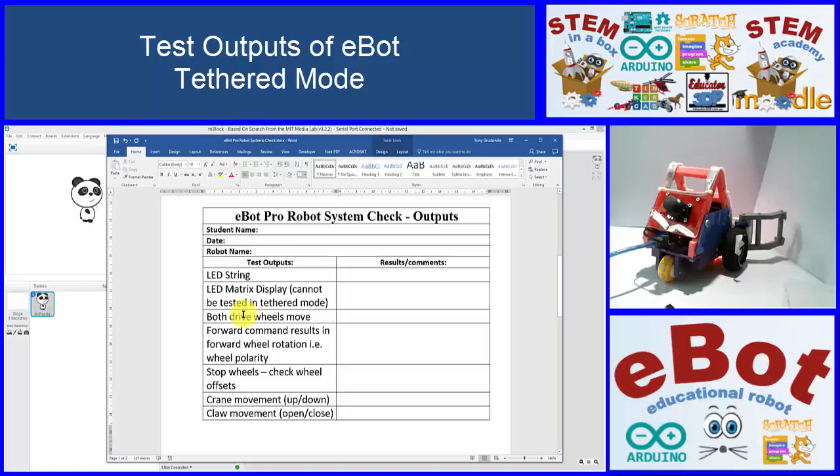Okay, now let's start with the LEDs. We're just going to do one by one, and then we can aggregate them. So let's turn them all on to green. Great, and they've all gone to green.

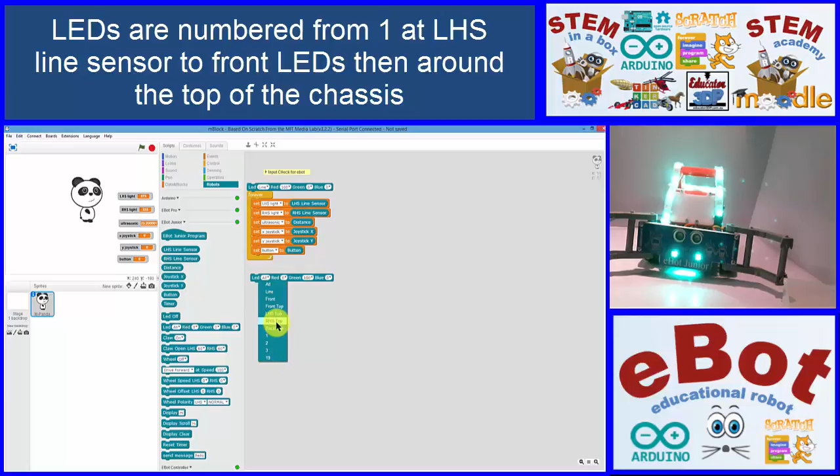Okay, now they're all individually addressable, and you can actually use these - well, these ones here won't work for the Junior, they're for the Pro - but you can just type in a number.

So if you want the line ones only, first you see what we're going to have to do is turn the LEDs off, turn them off, and then turn on what you want. So if you only want your line ones green, now you can see your line ones are green. So anyway, they're perfectly working, there's nothing wrong with that.

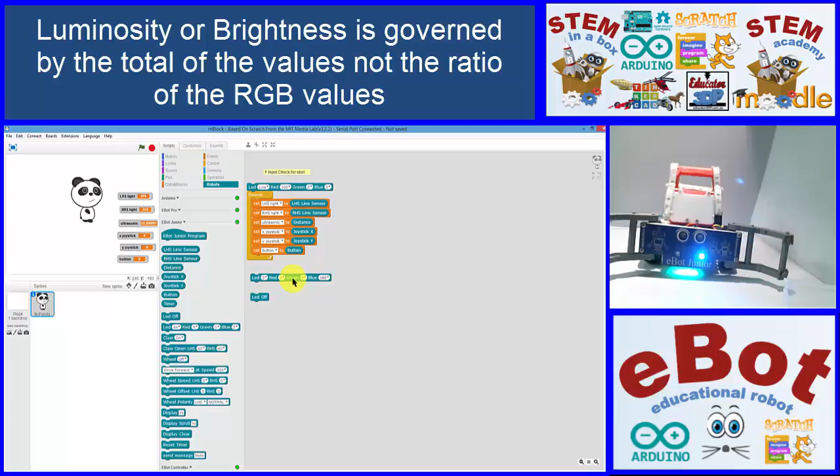You could also type in - one starts at the left-hand line sensor - so if you just wanted the front ones to go a different colour, that would be number 3, and you wanted that to go, say, blue. So number 3 comes on blue, etc. So I think you get the idea there.

Okay, so the LEDs are a check. The LED matrix we can't check in tethered mode. We have to write some code, we have to download some code.

So let's do the wheels. Before we do the wheels, let's pop it on a little test rig so that it doesn't take off. So what we're going to do is we need to do a couple of things.

The first thing we need to do is check that both of the wheels are connected, and we need to check that left is left and right is right. So let's drag the wheel off command there, and let's drag the wheel speed, and let's drag the wheel offset - I'll show you what the offset is going to do in a minute - and we're going to need the polarity.

Now the explanation for those is that when you flip the servo across to the other side, counterclockwise becomes clockwise. So we need a method so that you can issue forward, and forward would really be backwards for the one that you flipped. It's like your left is my right. So that's why we can do that in the software - it's just easier. Okay, so what we're going to do is just check that first.

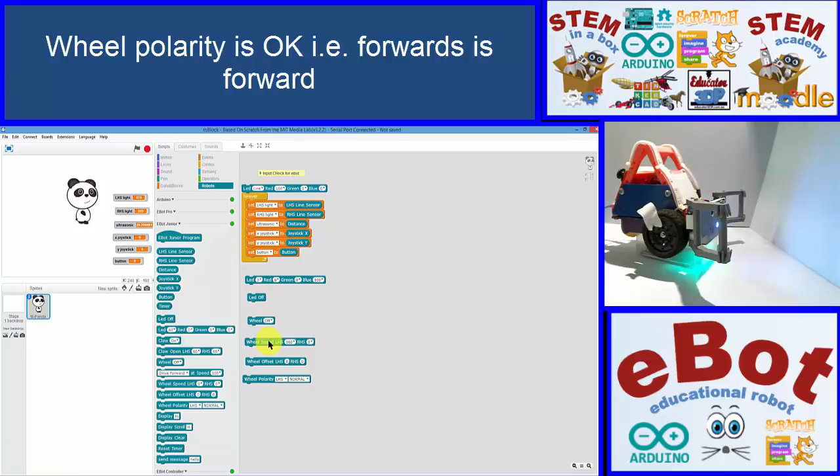So what we're going to do is we're going to get both motors to go. Well, we're going to get the left-hand motor to go forward. So let's just click that, and you can see there - I've just put some tape so that you can see it. So the left-hand motor is indeed going forward, so that's not a problem. We don't need to adjust the polarity for that - it must be what's called normal.

So now what we're going to do is turn on the right-hand side motor, and that's going forward too. Now,

if one of them was not going forward, I'll give you an example - what I'll do is I'll make the left-hand side reverse, and send that down, left-hand side reverse. Now let's turn the wheels off, and now let's turn the wheels back on. What you'll see now is that the left-hand side is going backwards, and that's because I've swapped the polarity here.

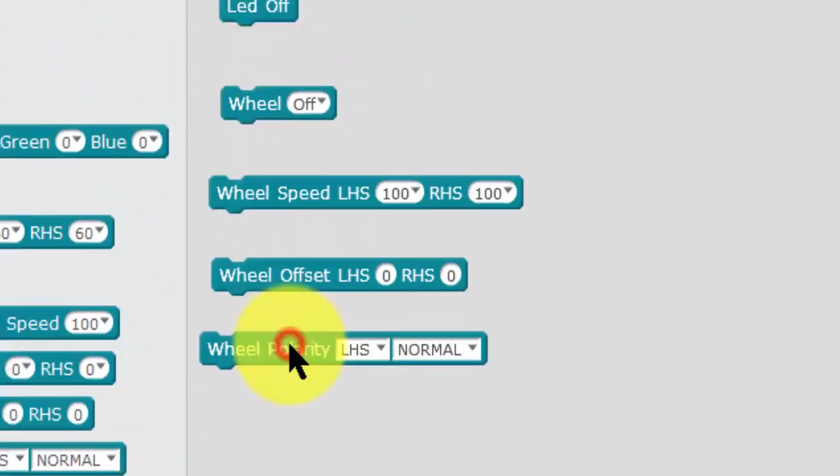So if when you do this first test, you get one of them going backwards - when you tell it to go forward, 100 is forwards obviously, negative numbers are backwards - then what you would need to do is reverse whatever you've got here. So I'm going to reverse that, swap it to the other way. First I'll turn it off, and then I'll make the left-hand side normal. So you'll need two of those really - one for the right-hand side.

Okay, so I'm going to make both of them normal, and then we'll see what we get. That's better, so left hand is actually normal, that's correct. Now the right hand one is going backwards. You should get one being opposite to the other, so the right hand side is now going to be reversed. I should have done that first, sorry. So I've just got my left hand normal and my right hand reversed because it was going backwards, and now they're both fine, okay?

One of them should have a reverse polarity because it's flipped. It's not necessarily because sometimes from the factory we get servos that are backwards to the others, occasionally. So that's the wheel polarity or the wheel direction. Forward is forward, backwards is backwards.

Great, we've done that now. So what we're going to do now is we're going to check is the left hooked up to the left and is the right hooked up to the right. So we're just going to stop the right hand side motor and issue that command. And the right hand side motor has stopped. So now we know that when this was built, or someone hasn't swapped it around, we know the left-hand motor is connected to the left-hand motor pin, and the right-hand motor is correctly connected with the right-hand motor pin.

Great, so what we need to do now is we need to check the all-stop drift, which is called the offset. So let's issue an all-stop command, and let's start with the right-hand side motor. What you will see is the right hand side motor is drifting slightly backwards. So we need to make it go slightly more forward, and forward is positive. So if we go to the offset, let's make it right hand side.

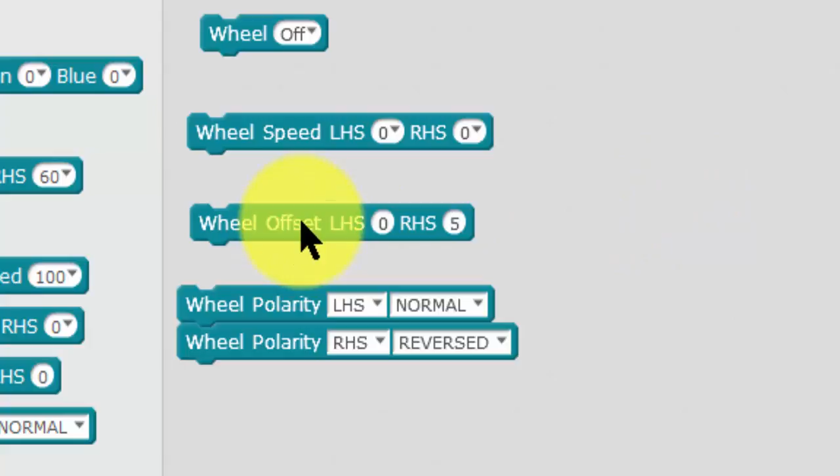So let's make it 3, and we're going to issue that. Okay, hasn't made any difference, so let's make that 5. Alright, let's try turning the wheel off and issuing the wheel offset and doing it again. Okay, a little bit more. Let's make it 10. So now I made it 10 and it's going slightly forward, so 10 is obviously too much.

So what we're going to do is make that 7. I'll just turn them off in between. So let's make it 7. Now that looks like it's about perfect. So 7 is my right hand side offset.

Now I need to do my left hand motor. So it's going forward, so it's going to need a negative offset. I'm just going to turn it off. So it's going to need something like, let's say -5, and I'm just clicking that to send the code, and then, I'm doing speed, sorry, I need the offset. So make that -5, send the code, and then get them going. And looks like I guessed it correctly, so it's not moving at all now with a 0 command.

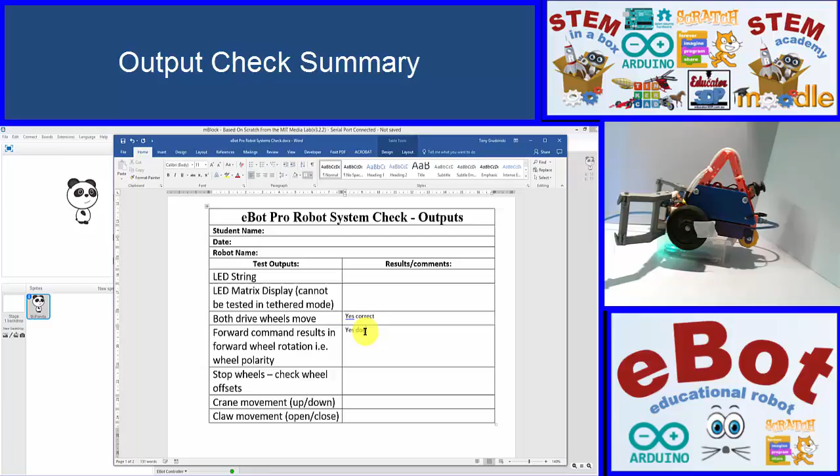Okay, great, so now what have we verified? Let's go back here. What we've verified is that both the wheels move, yes. The forward is forward, yes, so we've done the polarity. We've done the offsets, correct, yes. So we've done all of those, that's yes, correct, so the polarity. Yes, that's done, so we could record what it was. It's recorded there, so that's fine.

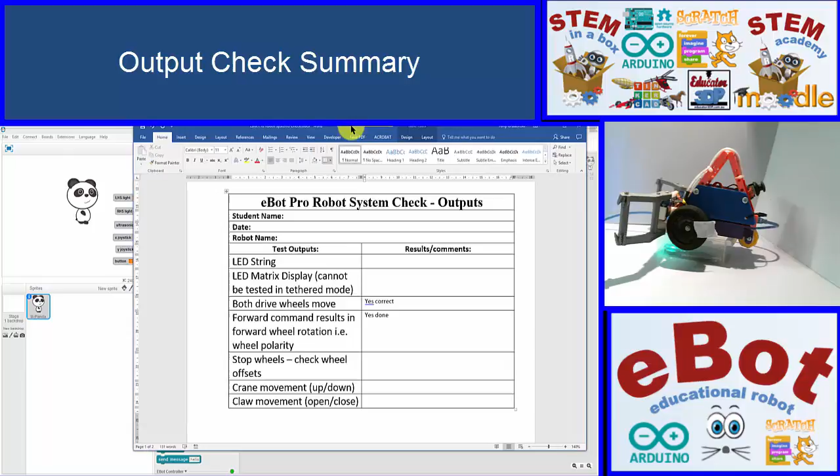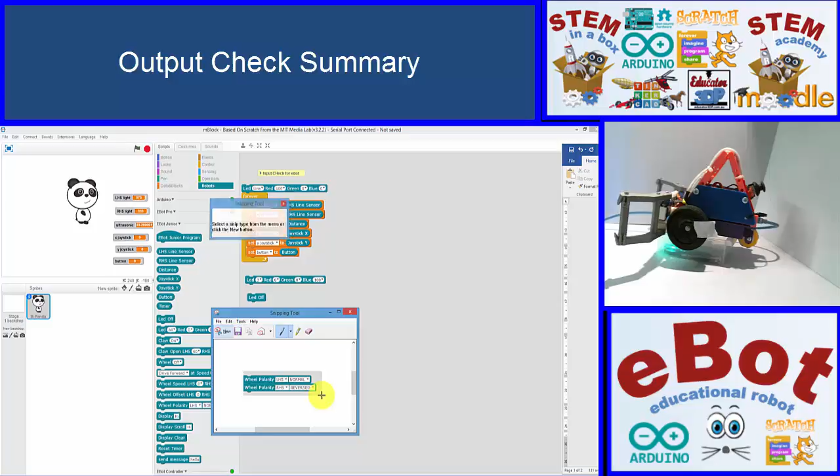And the offsets, so the offsets were, you know, if you wanted to, you could get them to record that they've actually done it. So we could go to the wheel offsets there. I'm going to copy that and put it in there, and let's say the wheel polarity, I'm going to copy that and put the wheel polarity in there, just so there's a record. Both drive, yes, yes.

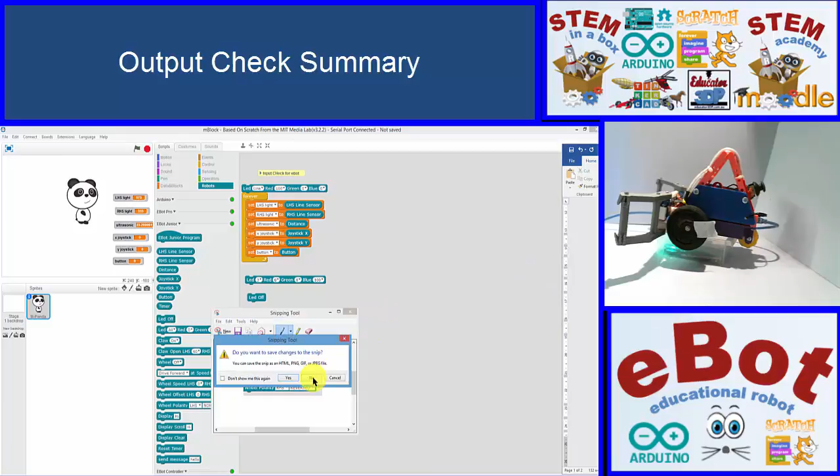So what I've been doing there is copying and pasting those screen snippets. This is my evidence, and it's also a record of what the polarity is for the robot name, or whatever it is, for this student's name.

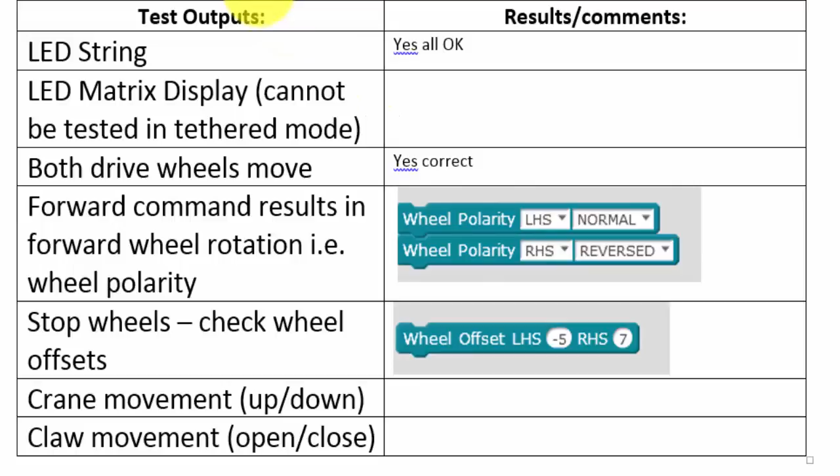So now we just need to go and do the crane. I'll put that back down there. Oh, the claws - the eBot Pro has claws and crane, the Junior only has claws. Alright, so let's grab some space.

I'll leave that there, don't jump to that, and we'll put all the wheel stuff here, like that. Put that there. Okay, now left and right claw. So what we're going to do is grab the claw on and off, and we're going to grab the claw open and shut.

When you first get the robot, what you need to do is close them both like this - we would have assembled it anyway, but if you got a kit or something. So that's open, 0 is obviously closed. You don't want them to close too much, because it depends what you're doing. If you want them to close all the way on 0, that's fine. It's just up to you.

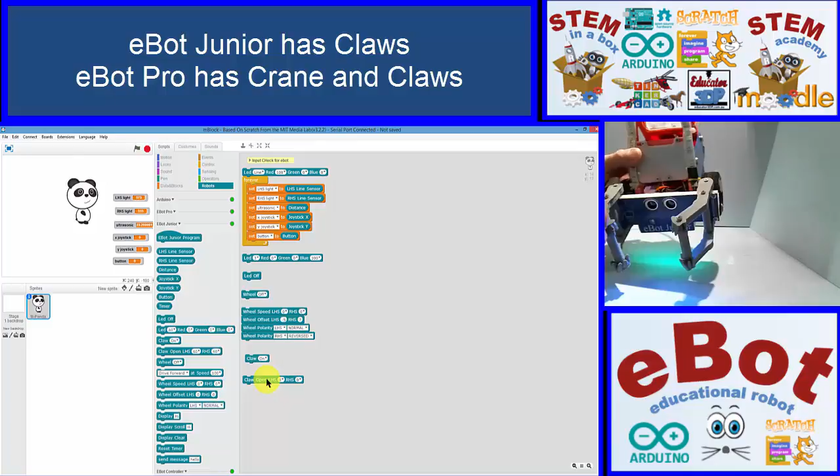If I wanted them to go further, I would just need to unscrew a couple of millimeters of the tensioning bolts here, and then unscrew the servo spline bolt here, lift it up gently, move the claw in 15 or 20 degrees, and pop it back down on the spline. Then when I go 0, they'll be where I want them. I've deliberately set the claws at that position because usually you're picking up big things, and you don't want the claws grinding on themselves too much. So that's at your discretion.

Now I'm happy with that, and I know that's the position I want. So now I'm going to issue the all 100% open command. Now you just need to check it's not smashing on anything, which it is - it's just hitting the rubber tyre, because these are really big tyres. So that means there's no hardware way out of that, because the servo rotation is set. We can't change that.

So what you need to do is maybe go 80 and 80, so they come in a bit, and now they're off the wheels. So what I would do then is I would want to record this, and go fully open - so I wouldn't actually use 100 and 100. I would use 80 and 80 as my fully open, because if I do go 100 and then open them and try to drive, it's going to be scraping on the wheel.

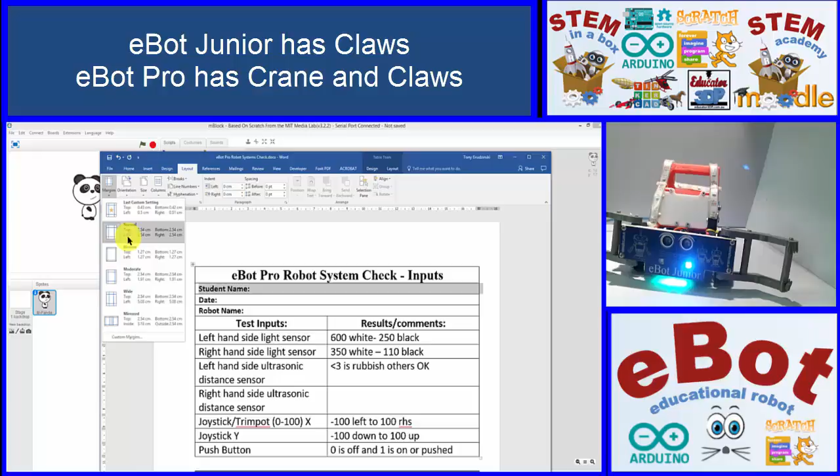So you don't have a crane on the Junior. If you do have the Pro, you need to do a similar thing with the crane. You just need to tell it to go all the way down, and make sure it's not smashing the arm of the servo crane into the body of the robot, because you'll strip the gears in the servo. You just need to pop it off and then move it up a couple of degrees.